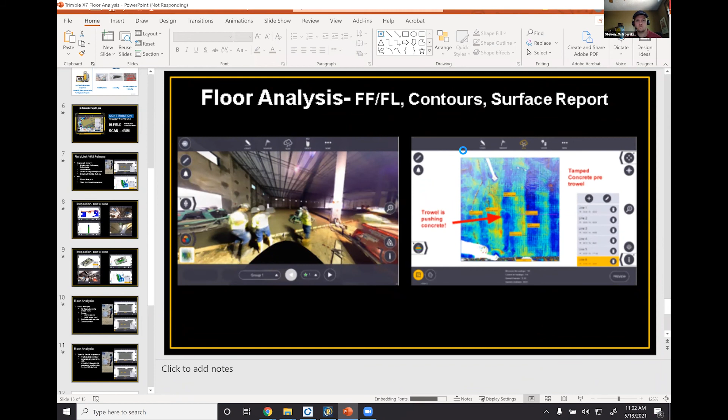FieldLink primarily runs on our tablet here, the T10 tablet. I'm going to be sharing my screen from my PC to give you this demo, just so we can see it live. Let me throw out a couple slides first, and then we'll jump into the live demo of what you see as my house scan there as well. Hopefully that didn't close down everything - it looks like it did, so we'll give it a second to catch up. Sometimes PowerPoint is a little slow.

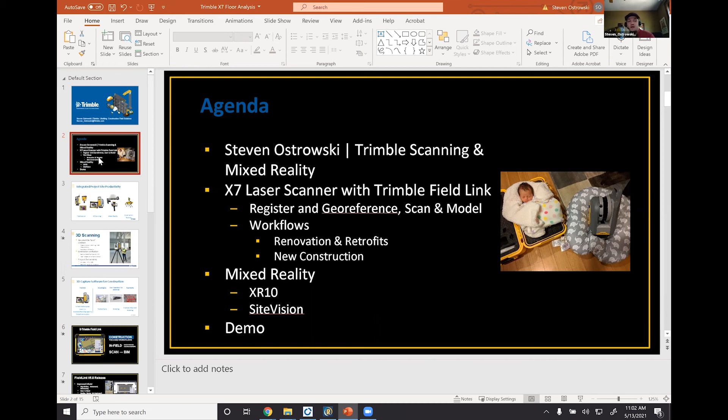An overview, because Steve is not on the line today, the other Steve - this is really what Building Point Northeast can offer you. A lot of you are probably coming to us already using or currently are users of our field layout technology. This includes our RTS as well as our new SPS986. These will tell you where to go to lay out and install your stuff correctly. The X7 now works with the same software that runs those instruments and scans.

Not only can you use the laser pointer to lay out, you can actually then scan and register and do all your processing on the tablet, export out as an RCP or RCS, a recap file, to send to Autodesk, Navisworks, Revit, or AutoCAD, as well as back to our programs. But essentially everything that you used to need to do with another desktop software in the office, you're now doing on the tablet with the T10 and FieldLink.

You're going to be able to scan and view the scan compared with the model. Today I actually have a model I made and created of my house to do a little inspection analysis of - very accurately, down to an eighth, sixteenth of an inch. You can also use our other mixed reality tools to overlay the model out in the field. These won't be as accurate, but are good for QA, QC, site walks, things like that.

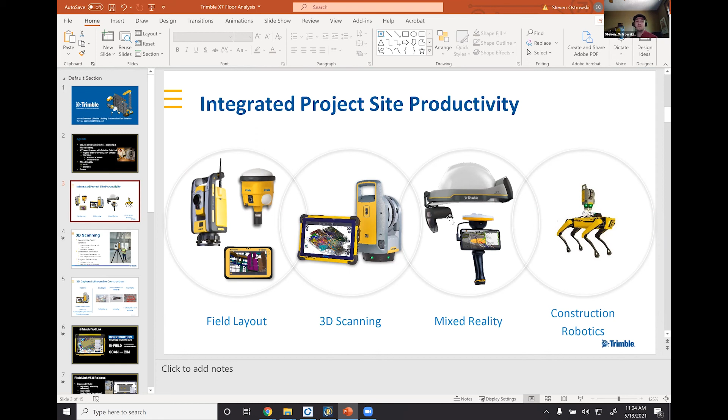So 3D scanning, what is it good for? A lot of times, and this scanner will definitely improve, the traditional way is to document the as-is - doing the pre-construction field measurements for renovation and retrofits, or collecting as-built if you're doing underground stuff. That's what you traditionally would use scanning for. This will improve that workflow and do the registration and georeferencing in the field so that those deliverables are faster.

One of the other huge things we can do is construction verification - scan to model comparison, meaning you can use the scanner on a new build, or as the project's going along, to see everything that's being put in. Is it in the right spot? Is it in the right elevation? Is the floor flat? You can do all that now.

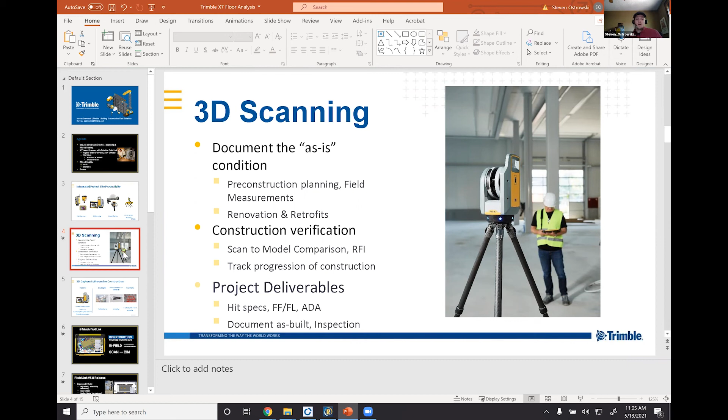This is just the kit - everything I'm going to show you is actually just in the X7 kit with the T10. We do have other software for some other purposes. Cloud Engine, if you want to publish your data so that your clients can view it online or even on their phone here. If I bring this up, it's going to be probably not that clear, but somewhat clear.

You can share that, and it will be a bit lighter of data, meaning we're not sending all the point clouds up to be viewed on the web, but you can send it fairly easily and start to see scan data that you can pop into and do basic measurements. That's Cloud Engine, good for online sharing so your foreman or anyone else associated with the project can get a link, if you give them access, to do basic measurements and see what's been scanned and compared.

There's Scan Essentials for SketchUp, if you want to bring the scan data into SketchUp to model. It's a good way to do probably site planning, more for your GCs, for quick, easy modeling from that scan data or from UAV data, if you have that as well, you can bring it in.

Then there's RealWorks. That's going to be our traditional registration software, as well as our advanced and automated modeling software from scan data. You can come in, extract out all the pipes, and then create model geometry or mesh objects that you can send to Revit and Navisworks, so if someone doesn't want an RCP or RCS to bring in, you can send them geometry. But those are the 3 other softwares, not needed for what I'm going to show you today.

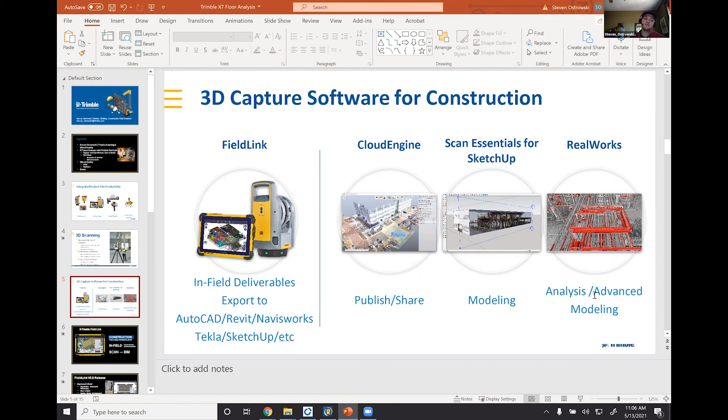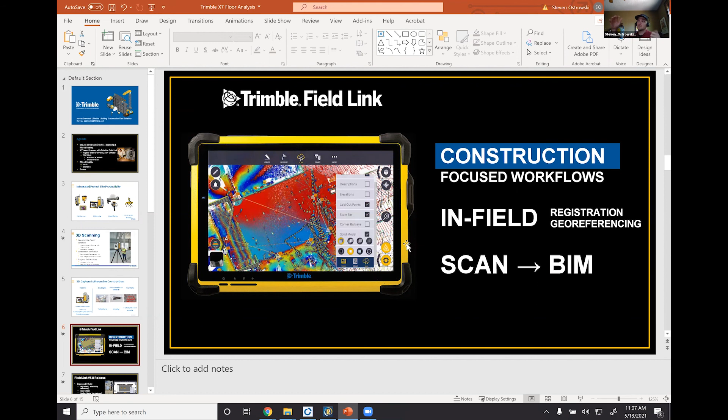FieldLink, one of the big things we're doing is, because we're doing in-field registration and georeferencing, we can do construction-focused workflows and really do scan to BIM. What you're seeing in this GIF is actually multiple scans before and after concrete's poured, grouping. You can see red to blue is actually the flat portion of that, as well as the collaboration model on top, so you can do comparisons that we're going to see.

We come out with weekly or quarterly releases on FieldLink. These are some of the highlights of what we can do and what we released in 5.8, 5.9, or 6.0 - I don't really know what they're naming it yet. It'll be coming out soon, we do it quarterly. It's been about a quarter, so I don't know exactly when, but they usually do some testing and we'll get it out in a couple of weeks.

With 5.8, we've improved on what people want every release: registration refinement, standard stuff that's been in there, scan to model comparisons for inspections like you see on the bottom, section box viewing improvements for clipping the data so you're not seeing everything, and exporting to RCP or RCS more efficiently and faster.

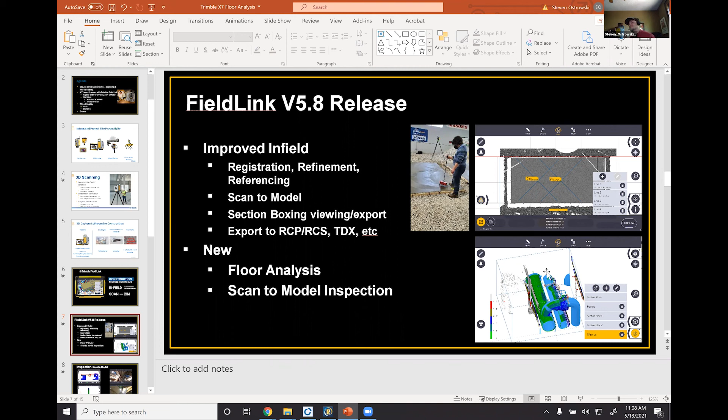The 2 new workflows we have, that we'll briefly touch on, are floor analysis and, primarily, scan to model inspection - essentially how the as-built differs from what was designed. We cover floor analysis more in our last meeting, but hopefully we'll show you very quickly here an example of this being used out in the field, with 2 different images.

The top 2 images correlate. This is a picture view of, if you follow my mouse, where that fire sprinkler was installed, from the perspective of the scanner. You can compare - what you're seeing here is scan data in red, with a key showing where it's deviated from the model. You can start to see that around this portion they missed an elevation on the install, meaning they're going to run into the HVAC right here. You can catch that, clip it like you see in the section box, and even share that data with the GC or other stakeholders on the project - someone's in the wrong elevation, they need to move fairly quickly, and that conversation goes.

The other thing you can use this for, and what I'll actually do today, is wall analysis. This is a 10-story elevator core, and we'll open this data showing the lean in from the back wall - specifically at the top here, where they're actually 2 to 3 inches, in the blue there, leaning in, meaning they're going to be out of spec and will have to grind so the elevator core doesn't rub up against it.

So this is a perspective of the scanner from the bottom of it, with some pictures showing you all the way up. If we had some fall protection, we could go mark those points out to lay them out as well, but we didn't. So we can just tell them, hey, the top 2 floors on the left-hand side, you're probably going to have to grind down.

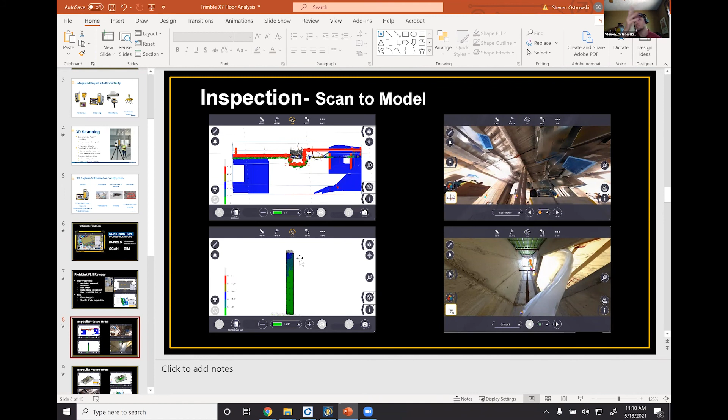2 more examples before we jump into the demo. Kind of a scan-to-model comparison with the FFFL, or the super flat floor, that we did here. So we actually did a comparison for an FFFL on the pads here, but we can also just do a scan-to-model comparison without doing those floor workflows.

So here is the model created for the Local 404 warehouse where they're doing the super flat pour, and then a comparison where everything in green is within 1 inch of design. So the top of concrete was fit really well.

And on a live site in an engineering room, here is actually VCU down in Richmond, their mechanical room they're installing, as well as some of the mechanical pipe that was offset or put in off wrong control a little bit. We were able to scan and see that comparison of being about 3 inches to the south because control was wrong, and then they were able to fix this prefab pipe that's coming in to connect.

So you're still, if you do make a mistake, able to catch it before the trucks go out with the new prefab stuff. You don't have to weld that 12-inch pipe out there in the field to fix any of those mistakes.

Hopping into the software. So I'm already connected to the instrument behind me. You can see it's got its green little lights on. And I've scanned my house.

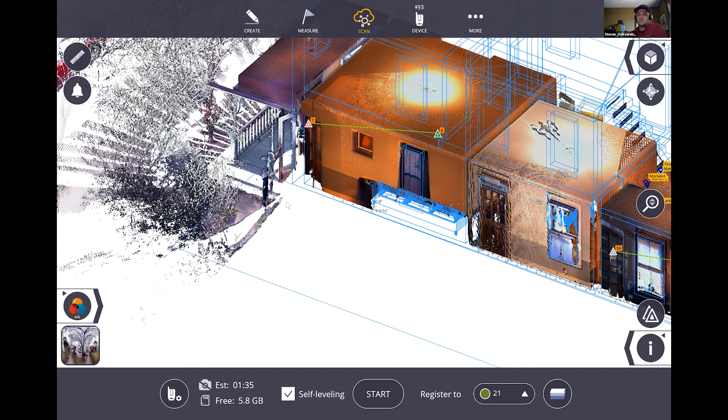When you're a sales engineer for scanning, you generally scan before you move in. So before it gets all dirty, I scanned it, and I was able to quickly model it in an hour or two in SketchUp. So we have a basic model in the background here that I can turn on.

I'm also only viewing the first floor just to make it a little bit clearer, but obviously I scanned the outside, I got the whole house, and you can see a little bit of the extents.

What we're showing you today is going to be like an indoor workflow. It's going to show the scanner just on my office here, but obviously the scanner shoots 260 feet, 500,000 points a second. When I'm working indoors, I'm probably only scanning at 12 million points per scan because that takes about 30 seconds. If I'm going to shoot something larger or farther away, I'm probably going to shoot it at a standard scan and collect more points so that I get a better overview of it.

But here we already have the scans already registered, so they're in a coordinate system. If I exported this out as an RCP, they'd pop into the right spot there, and they're registered. So there's nothing else that really needs to be done. I could send just this first floor as an RCP. They're already colorized, pop it into Revit, Navisworks, or even Recap if I want to view them.

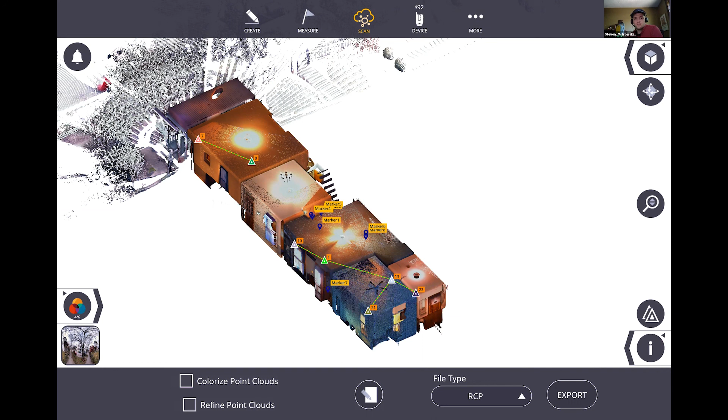To show you quickly how we do some of this collection, I'm going to collect one more scan. Obviously, I collected these scans before we moved in a couple months ago. Time flies, I think it's been more than 6 months now, when nothing was there.

So I can jump into the scans to show you roughly what they look like. But obviously, this is before the kitchen was filled up. You can, in these station views, start to take measurements. But I wanted to also show you a couple more things, which is what did this office look like before we got here?

This is actually, because there was no light in here when I was scanning at night, kind of what it originally looked like. We're going to scan and hopefully register back to this scan because these walls are in place. So as long as there's some vertical surfaces that are the same, the two scans will match together and tie together in what's called a registration, pretty easily.

We do have some manual ways to stitch these together if you're spacing it out. Now, because I'm indoors and the walls are already up, there's a ton of overlap and vertical surfaces, so I shouldn't have any problems in my office. But if you're outside and only steel's up, we do have manual ways to tie these together if it doesn't work perfectly.

So we're going to go ahead and collect and get to the scanning so we can do the analysis and be out of here in about half an hour. Like I said, I'm indoors, so I'm going to collect 12 million points in about 30 seconds. That other minute I'll explain.

If I'm outdoors and need more detail on something, I would scan probably at the standard level. That would give me enough to see the diameter of a pipe down to 1/8 of an inch if I really needed to remodel it. If I'm just doing as-built verification or something like that, I need a lot less scans to do that.

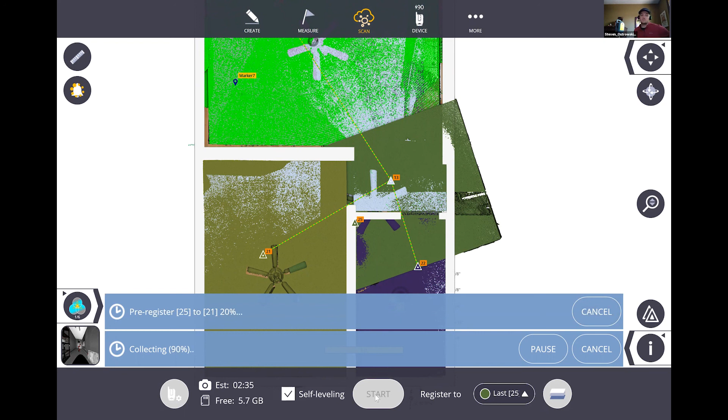Here's scan 25, and it's going to try to register back to scan 21. Usually this all happens automatically in the field. For the times it doesn't work, you can manually align it as well. So we'll let this one try to figure it out, and we can also align it manually.

Pictures are about done. Once they're done, you pick up the scanner and move it. Depending on the job site and how much detail you need, that determines how far apart each scan is. Because the walls are close here, I'm popping it in and out frequently. You can see I had the door open between the hallway and bathroom, but usually you'll pop into the doorway and scan around. If you're on a job site that's completely open, you're running 30 to 50 feet between scans.

Here you can see scan 25 and 21 are now registered to each other from those walls. They're pretty close, obviously, because it's not a very big office.

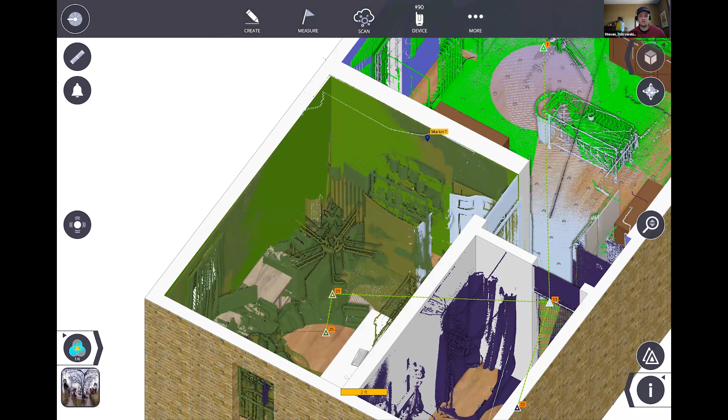I can now come in and start to look at this data. Unfortunately they're similar colors, so if I view it in this per-station color view, it gives me an idea of what was there and what isn't. I probably should have tested this with another scan that would come in a different color, but right now the darker green is scan 21 and the lighter green is scan 25. I can also view it colorized, in grayscale, and a couple other ways to see what I have.

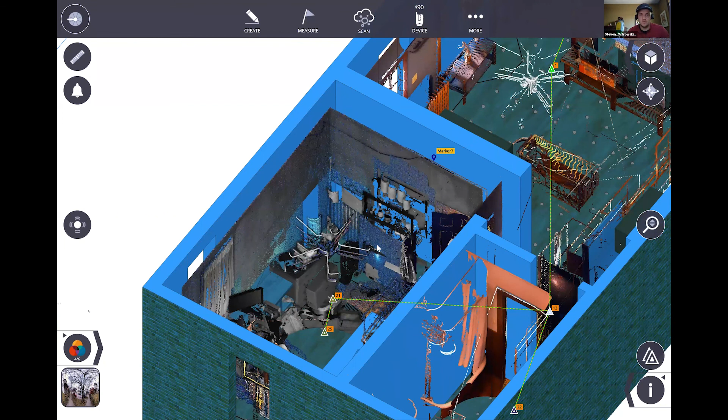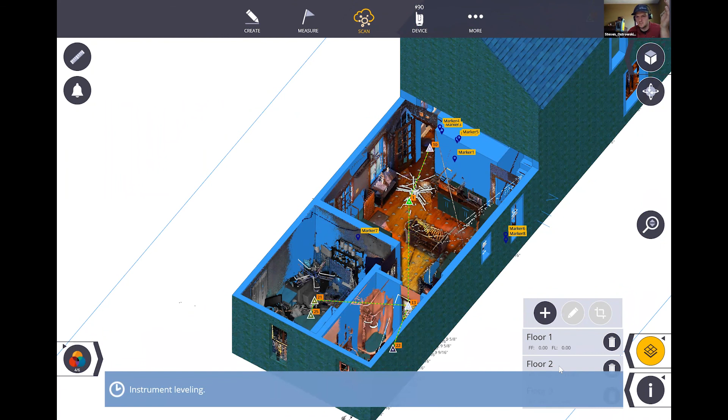Here, let's jump in and start to show you the analysis. After I've collected those scans and they've registered, I can go through this process, which I've already done once. We covered this with our last demo. This is an analysis for the floor, going through the entire floor here. Let me jump back and turn off the model. I can actually see how my floor slopes in quite substantially.

Click on floor 2 here once it's done leveling, and it's going to kick it off. This would be the floor analysis. You can come in here and start to see cut-fill lines, higher or lower areas. You can set a reference elevation or find a drain to make sure everything is pushing that way. You can do this throughout the entire job or into a specific room. This floor isn't flat enough, due to the age of the house, to actually do an FFFL — you can, but the points would just be bad. Instead you can come in here and create a report of just the high and low spots.

So this is the surface analysis we did on the previous one. The next part I'm going to jump into is the scan-to-model comparison, the inspection.

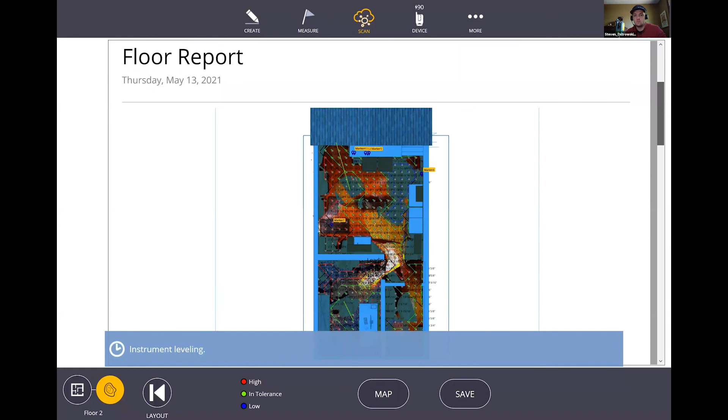But here is that report. These points will be created with elevations that you can send just as a CSV, or get rid of the scan data entirely, just so those are on.

Keep the DWG or the grid lines on. Here I have my model outlined in blue, but I could just turn on different layers to show just that. And then it'll give me cut, fill, total volume, above and below, as well as square foot area. But generally, this is going to show where the floor is bad fairly quickly.

Moving on to the inspection, or the other function we have in 5.8. Rather than just doing a level comparison, it's going to do a scan to model comparison.

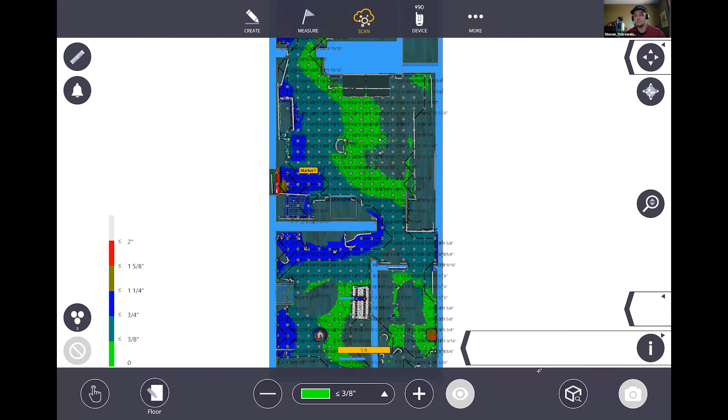So I've actually already ran through here. I'm going to turn off the model to show you what it looks like for the floor. This actually looks, I think, fairly good for analyzing that floor.

If I just do this, I'm actually going to close it down and pop it back open to get that toast out of the way. Disconnect. And then we'll show you that.

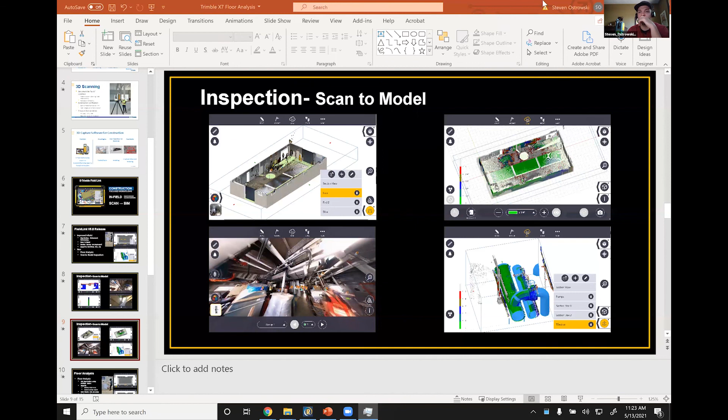That's the beauty of a live demo. Sometimes you just get a little bug that pops in. So in order to tap into some of those other functions, I'm actually going to just close it real quick and then reopen it so that toast goes away.

But what I'm going to show you is the scan to model comparison of just that flat floor, which is going to probably show me, I'd say, better visually what's happening. And then I'll show you on the wall and a couple other examples too from some other projects.

Let me see, are there any questions so far? Nope.

How you place these scans to the model is kind of going to be important. If I wanted to do this very accurately, I would set up the X7 like a total station. I would shoot two control points and then scan afterwards. That would place it exactly where it should go.

If your setup is good, I generally will actually manually align it, and I'll do that with the second scan, or the 25th scan we did here today, or whatever number we're on. And just do that for a vertical analysis.

90% of the time, 80 to 90% of the time, manually placing it to like a stair core or steel is going to work, because you're going to see essentially all the other steel components are lining up. So if you place it to align to that, it should be good. But you'll see which column lines are potentially out as well.

So moving back in here, sorry for that delay. I'll go back into the scan inspection. I've ran this a couple times. So one for the entire floor, I can click and then start to view, and I'm going to turn off some of these other functions just to make it a little clearer.

So here I'll pump in and turn off the points. These are actually all the elevation points that are grid line from that floor analysis. I can turn those off though, just so it's a little clearer, and then turn off the model as well.

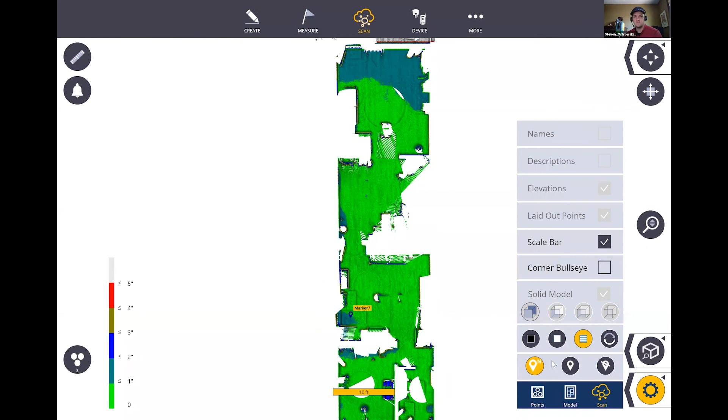So you can see kind of the middle of the floor bending in, obviously over time. That's where most of the weight is. The floor is kind of settling in.

But this is that scan to model analysis that I was able to just run by sectioning down and turning on the different layers that I wanted to compare. Another one would be kind of like this wall analysis as well.

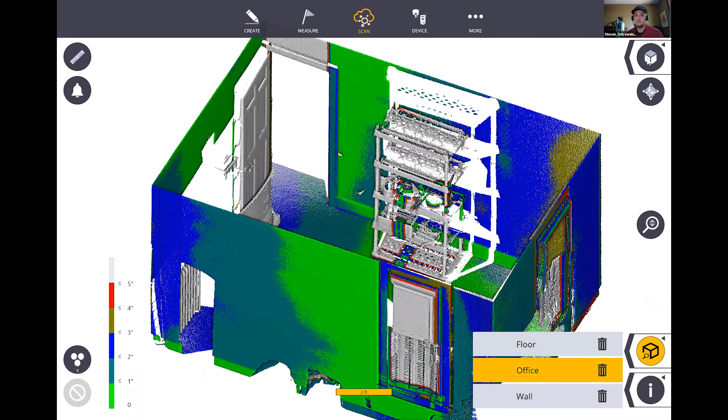And this is what I've done earlier, but we're gonna actually redo here now as well. So you can start to see the alignment is a little crooked. So I can actually turn this off, come back in and re-register scan 25 to be a right angle to the rest of this.

Let me turn off some of these scans and show you that. So turn off scan 21, scan 22. Now we only have scan 25 there.

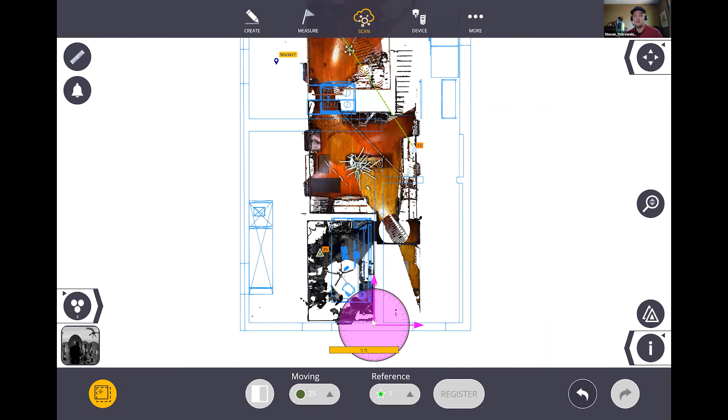I'm going to kill it and then turn the model back on to finally align and do a very good, I'd say very precise wall analysis of what's behind me. I'm going to change the center of rotation here and line it up. I'm going to essentially try and align this flat wall as best I can to what was designed.

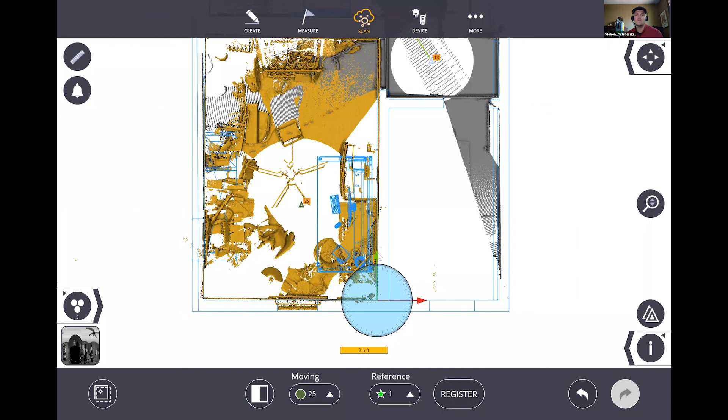So I can get rid of this rotation angle that's there as well. It'll give me a better idea of how accurate that is, because these previous scans were probably aligned to the front wall, or they definitely were aligned to the front wall. I can't really change that, but I can look at, visually, where it's bumping in and out rather than getting this angle of rotation here.

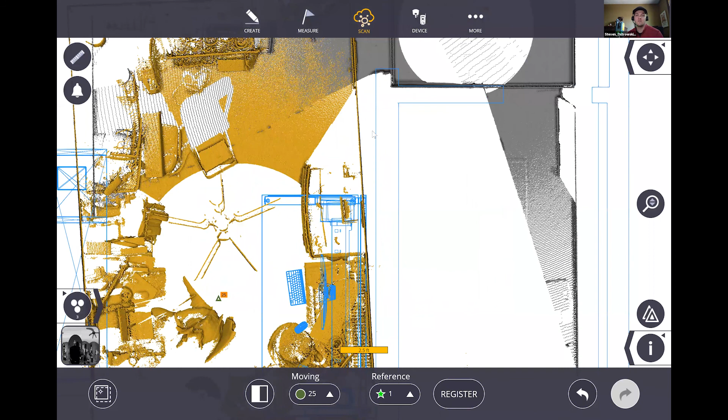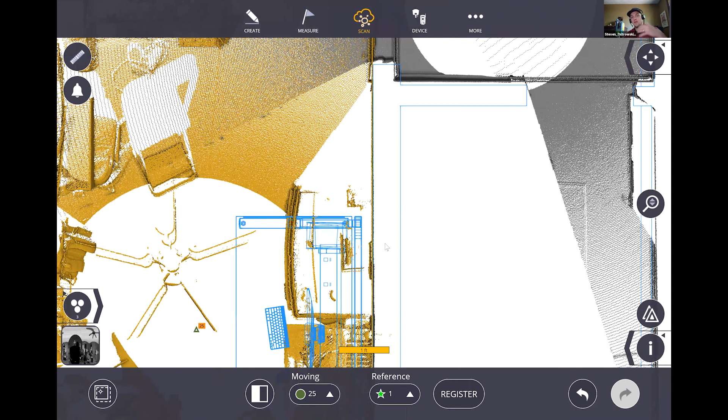So here I'm just aligning this just so it fits this wall very well. It'll give me a better idea of seeing the bend of it rather than using the alignment at the front. The front of the house was probably built at a right angle. As they moved back, it curved, meaning this wall behind me is probably at a deviation to the front of it.

That's life, I'm gonna have to live with that. But what I really want to see is the curve of the wall, so I don't want to actually look at that bend. That's why I'm breaking the scan away from the registration at the front and doing this analysis instead. So it is important to think about that registration, how you reference to something when you're doing these workflows.

Again, these are more advanced workflows. These are for when your VDC guys are out scanning — we do have some customers who will have their VDC guys out scanning so they can do this comparison analysis. If you're just scanning and doing the collection though, you can always do this analysis back in the office later.

Bump it in to do the inspection again. It'll save that location. I will then create another section box and run the inspection to show you how that looks. So here we'll do the wall, section box 5. Maybe this will be a better one.

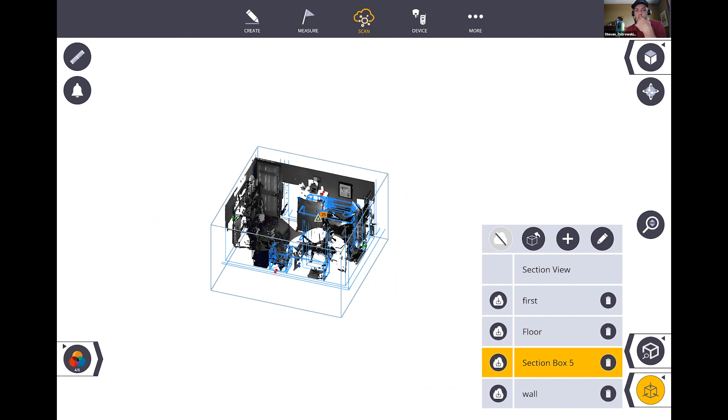Essentially, this is already a created section box. I can push this in and out though, so I can only look at the wall I care about, which would be the one behind us. And then once that section box is set, I can turn on different layers or turn off different layers as far as the other office furniture.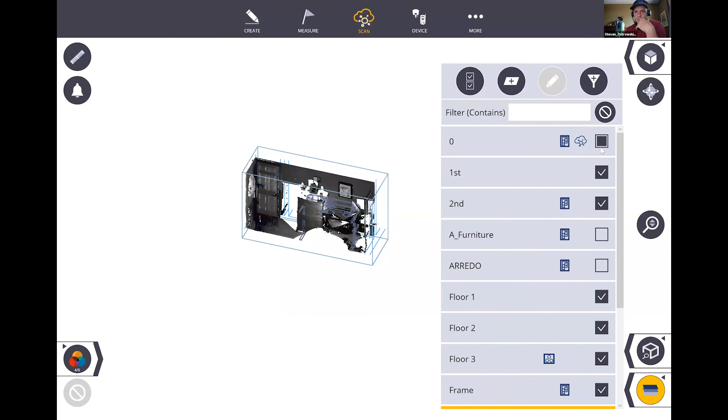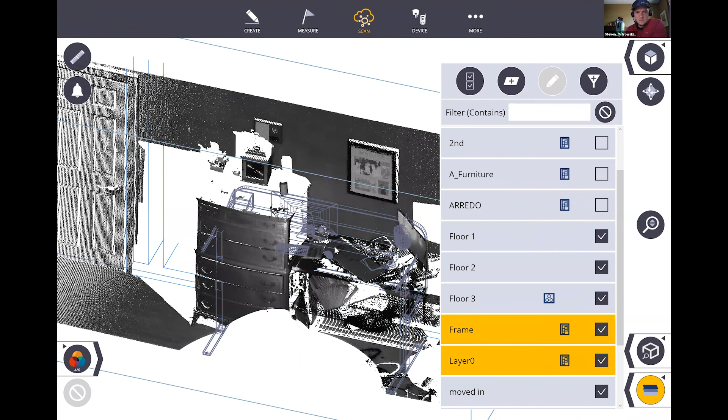So I'm probably going to get rid of the fake desk I have in there, which maybe I can see by turning it on and off there. I may have it on the wrong layer anyways. So right now I'm just trying to find out where this one is, which looks like it's on layer 0. All right, we'll run it anyways because I don't want to keep spending time figuring out which one that is. I guess I can do this though — that's layer 0, which I think is also the wall one.

But after I have the layers turned on and off as I want, I can run the comparison by just clicking the inspection tool. So what's going to happen now is the really neat part — it's going to compare everything that is scanned to everything that is visible on the model of the layers you have turned on. So it's going to show me how the as-built, or how my desk and dresser behind me, differ from what I modeled in as a standing desk, as well as the wall features.

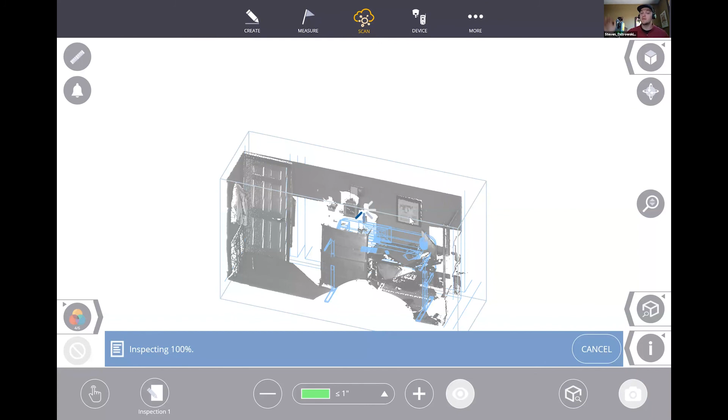So you can start to see the bend. You can do this inspection on anything — if you have it scanned and you have it modeled, it'll run this analysis. You can see obviously this desk is why you see that highlighted area there. The wall is fairly flat, but I can actually bring this into a finer tolerance.

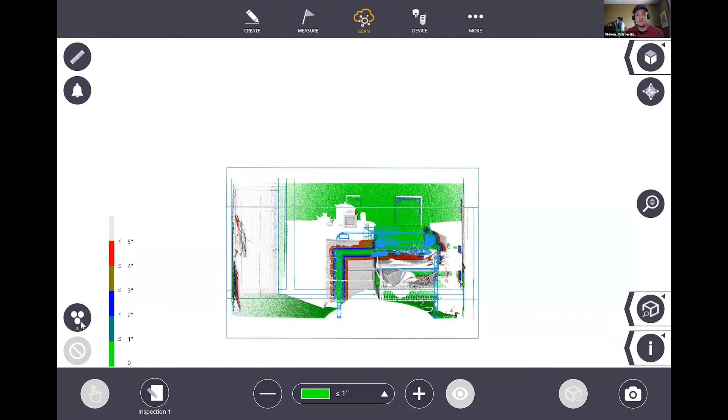So if I bring it into, say, 1/4 inch, you're actually going to start to see how the pictures are essentially out 1 inch on the wall and how it kind of bends or curves at the top of it, as well as when you get closer to the door, it kind of moves in too — which visually I can see over here, how that bends in towards the doorway. I did not model the doorway, so everything there is in gray.

So any of the scan points that are 1 inch or more away from a model component that's turned on will be gray. Anything that's red is within 3/4 of an inch to 1 inch deviation. This light green is within 1/4 inch, and the darker green is 1/4 inch to 3/8 of an inch. So you can start to get a very good idea of where that deviation is coming in.

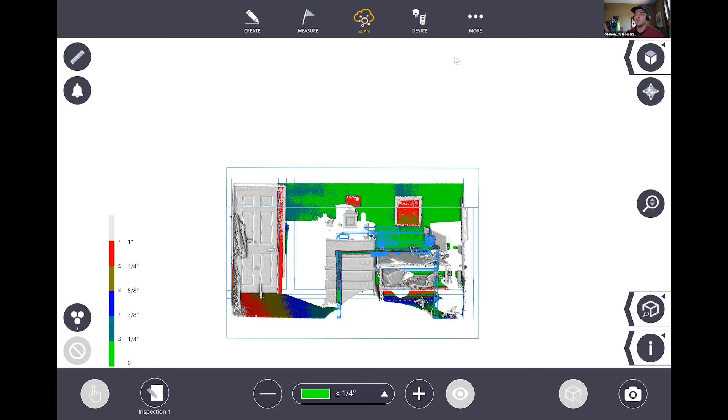This is a live demo, that's why I'm showing you this right now. I'm going to show you some other data sets just to do this.

This is actually an HVAC example. I'm going to open up an image where the HVAC guys were going to install everything laid out within the mechanical room. The fire sprinkler guys had already started to put up their stuff, but they put it in the wrong spot, meaning they were in the right XY, which you should catch fairly early, but they were in the wrong elevation.

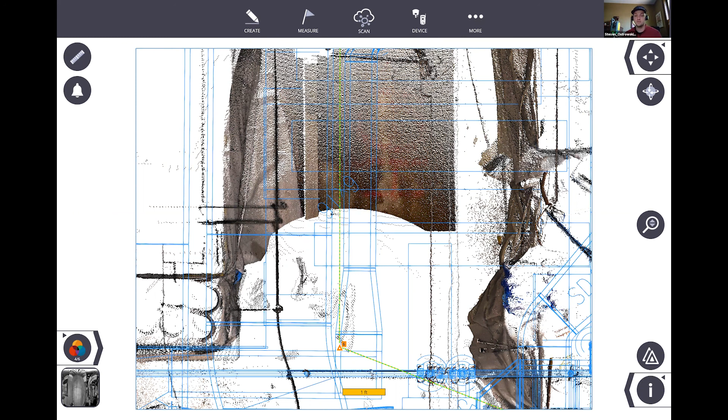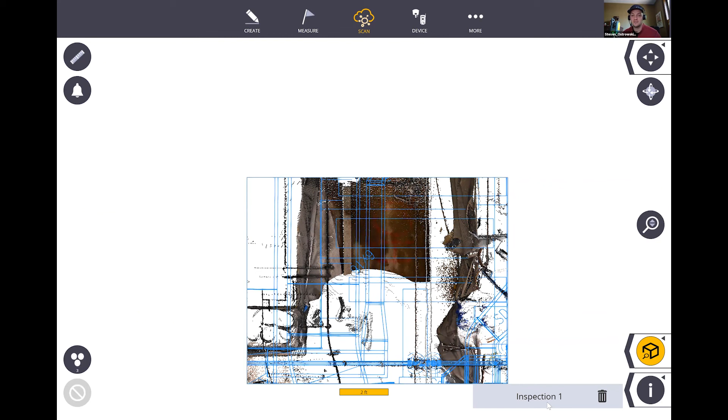So here I've already pre-clipped. We went in, scanned, did all the registration and movement fairly quickly and easily. We knew this was going to be a problem too, if I'm honest. Even the guys on site told us. But here is just that inspection between the HVAC model, the fire sprinkler model, and the scan points.

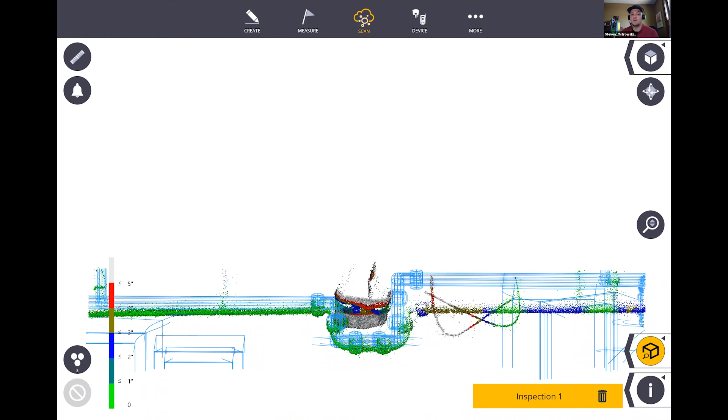Everything green here is within 1 inch of design. So you can see they were supposed to route around the existing steel on this renovation, new build university job, but they didn't come up in elevation. So they're about 3 to 4 inches out of elevation. Now as they go in, you can start to see where they clash back with the other HVAC components that you can bring in.

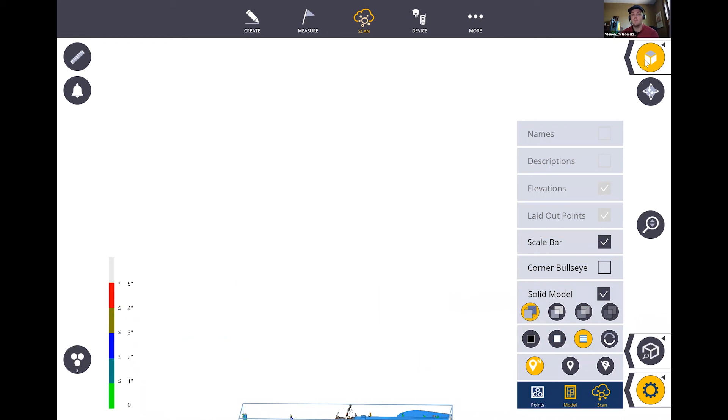You can bring in any type of model into FieldLink now. There's a way to bring in even Navisworks. We can use Connect to bring that in, Revit, and multiple file types to do this comparison. If you have Navisworks, great, you don't need to bring in multiple DWGs, but if you don't, you can bring in your multiple DWGs and IFC models from Revit.

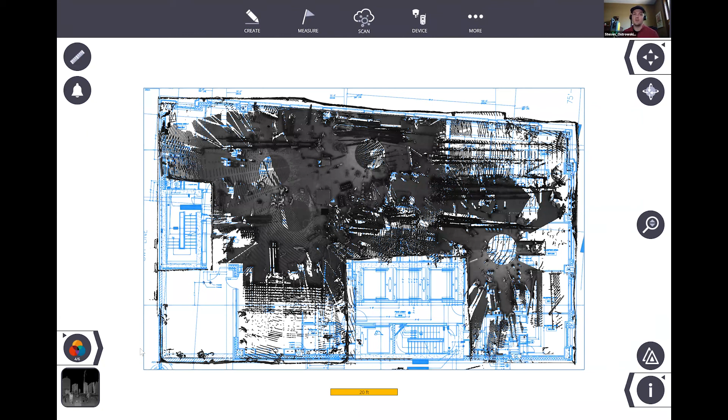One other quick example I like to show: if you don't have 3D models, even if you're just checking because you're putting in the sleeves, you can scan and compare back to a 2D model. So while the inspection tool is great, if you don't have it, your guys out in the field don't have the model and probably couldn't comprehend it. They can easily resection like they've been doing before, and zoom in and start to see with 2D drawings where sleeves are and if they're in the right location.

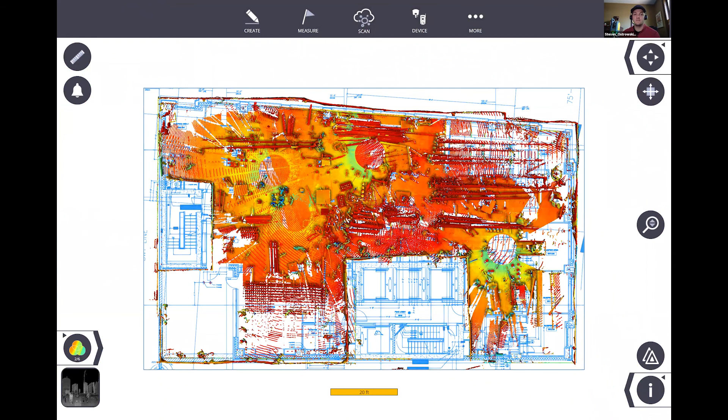So in this, I just have a 2D drawing. I can zoom through. Within 20 minutes, I'm able to scan and do this analysis at the same time to make sure everything's in the right spot. Let me turn this on one more time, and turn the outline view on, because that usually makes it easier to see those sleeves popping in the right spot. As we move through the different bathrooms, you can see that as well.

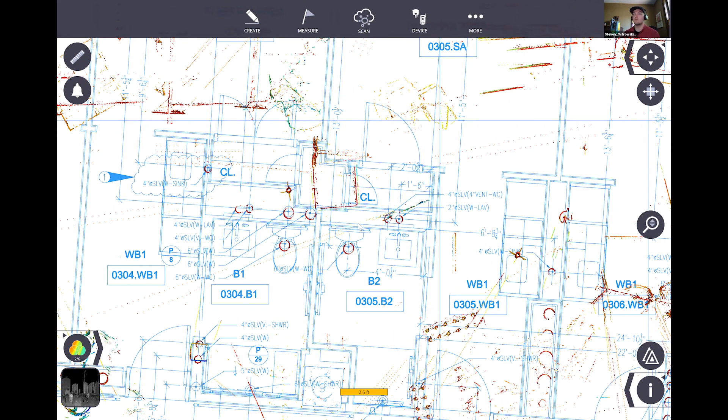So this comparison, again, very quick to do. That's about it for the live demo - get to scanning and comparing the as-built to the model. Obviously if you didn't have any model and you're just collecting because you were doing a renovation job, you're not really doing the analysis while you're sitting there, but the scanning and the registration and georeferencing is still going very quickly. But I'm about 3 minutes over time.